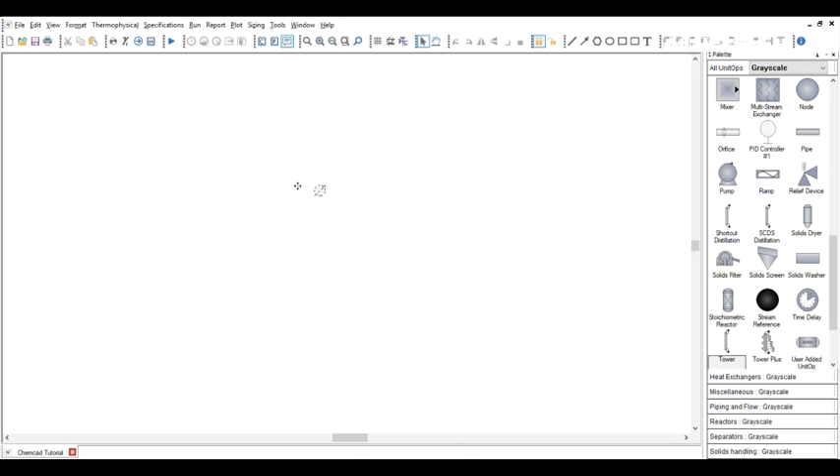We're going to add a distillation column, so scroll down in the palette until you find tower, this one right here. There's several to choose from. We'll just choose the regular tower for today and drag it onto the blank worksheet.

Scroll back up to the top of the palette and add the feed stream and product stream. Connect the feed stream anywhere on the column's left side to one of those blue dots, and then drag two product streams, one for the distillate and one for the bottoms.

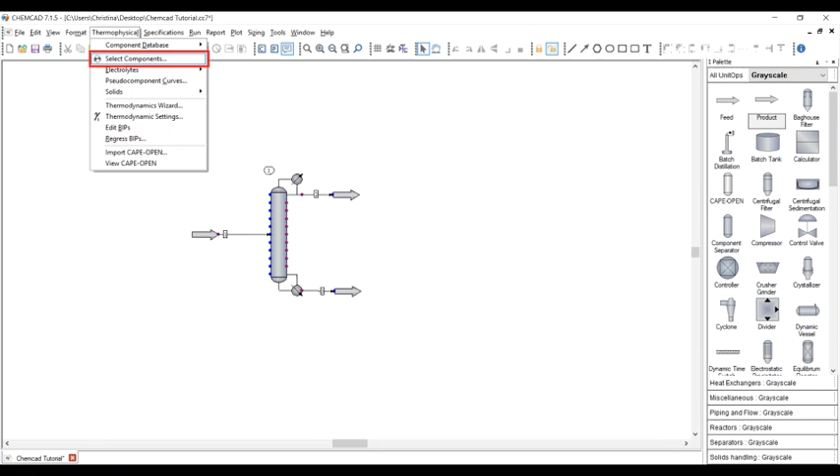Now that your distillation column has been set up, we need to select the chemicals that we're going to add to our distillation column. Come up here to Thermophysical, click on Select Components. Use the search bar highlighted in red to add the components butane, hexane, and pentane.

As soon as you select OK, the thermodynamics wizard will pop up. We won't worry about this now, just select OK. The next pop-up shows that SRK is the thermodynamic model they've chosen. We are going to change this in a minute, but select OK for now.

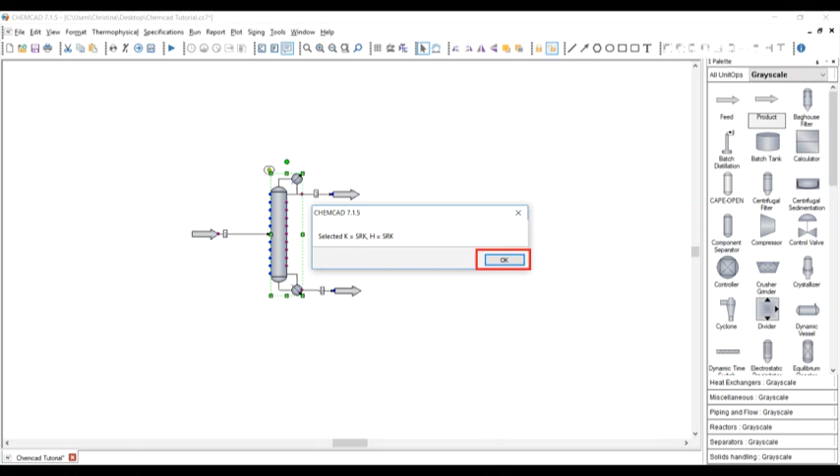The thermodynamic settings prompt will appear. Underneath Global K-Value Model, it should say SRK. Click this drop-down menu and change that to NRTL. Then select OK, and on the next prompt that appears, also choose OK.

Now we are going to open CHEMCAD. If you have trouble opening CHEMCAD, make sure that you're connected to the internet to authenticate your license. If you don't have a license, you're going to need to get one before you can go through with this. So open a blank workbook as I have here. If yours is not yet open, go ahead and click on this icon. We're going to start by saving this document. Save it to desktop as CHEMCAD tutorial.

Make sure that this palette appears on the right-hand side of your screen. If it does not display when you open up your screen, follow these steps: go up to View, and the palette marker here should appear. Check it, and the palette should now appear on your screen.

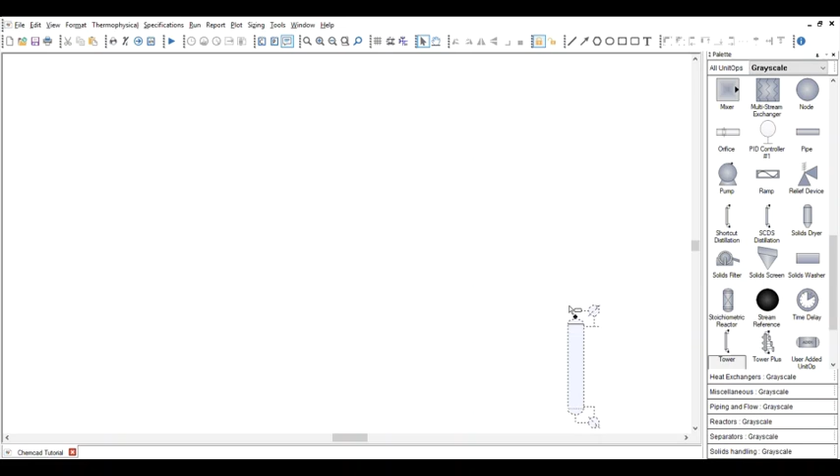We're going to add a distillation column, so scroll down in the palette until you find tower. This one right here. There are several to choose from, but we'll just choose the regular tower for today and drag it onto the blank worksheet.

Scroll back up to the top of the palette and add the feed stream and product stream. Connect the feed stream anywhere on the column's left side to one of those blue dots, and then drag two product streams, one for the distillate and one for the bottoms.

Now that your distillation column has been set up, we need to select the chemicals that we're going to add to our column. Come up here to Thermophysical and then select Components. There are many components to choose from. You can scroll through to find the ones you need, but I find it easier to search in this bar. Since butane is one of the components we need and is automatically appearing, you can just click on it here and add it.

Another component we need is hexane, which I'm typing now in the bottom search bar. I can click on it and click this arrow to add it, or I can double click and it adds it as well. For the last one, find pentane. You could scroll down this bar to find it, or type it in the search box. Be sure to select the correct pentane - we've got isopentane and pentane, and we want just pentane.

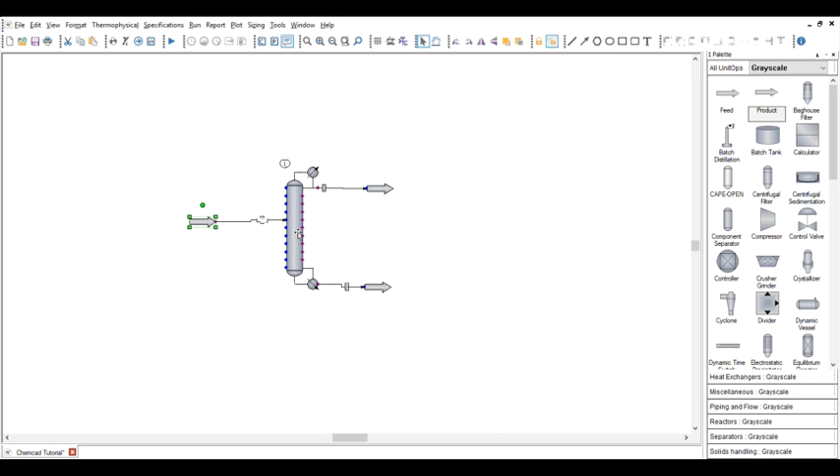Next, we need to specify the column. Double-click on the distillation column. First, under the General Editing tab, you want to fill in anywhere there's green highlighting important information. So for the number of stages, I'm going to choose 10, and for the feed stream, I'll choose 3.

Next, our tower needs further specifications, so click on the Specifications tab. For the condenser, we are going to specify a reflux ratio, R over D, of 2. And for the reboiler, we'll choose a bottom component fraction recovery of 0.98, for the heavy component, which I happen to know is hexane. If you didn't know that hexane was the heavy component, you could run this simulation with random specifications and figure it out based on which component appears more in the bottoms than in the feed.

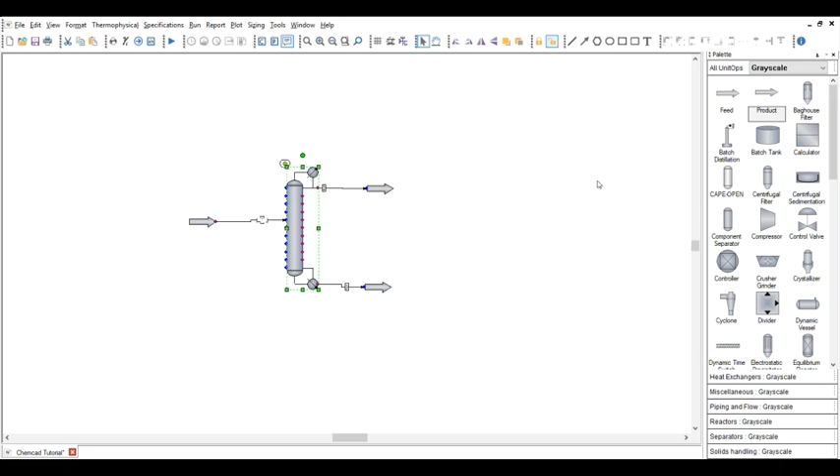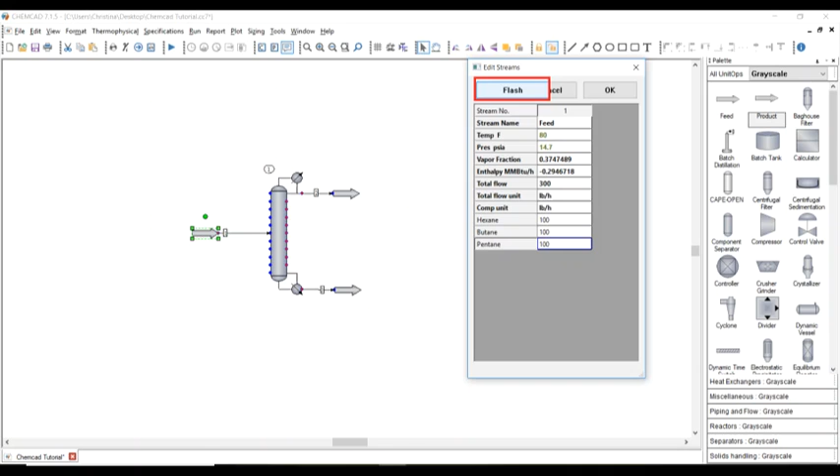Now we will specify the feed stream by double-clicking on the feed arrow and inputting the following data: stream name, feed; temperature, 80; pressure, 14.7; and down at the bottom, butane 100, hexane 100, pentane 100 pounds per hour. That'll give us a total flow of 300, which it should automatically solve for. Now, if you choose flash at the top left, it will solve for your vapor fraction and enthalpy automatically. Select OK, and now we are going to work on our unit op specifications.

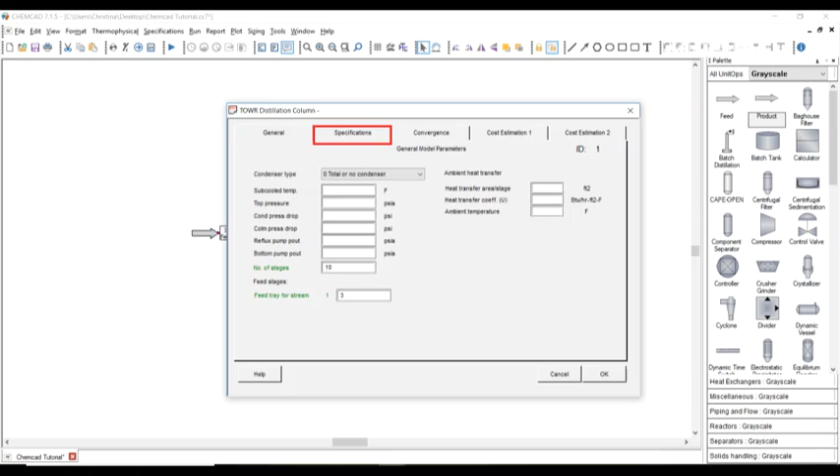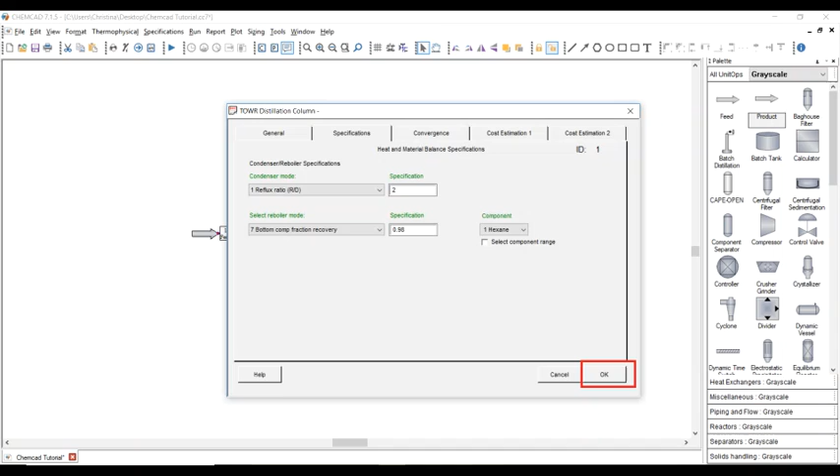So double-click on the distillation column. Under the General tab, type in 10 for the number of stages and 3 for the feed tray location for stream 1. Then go on to the Specifications tab, where we will change the condenser mode specification first. Choose reflux ratio, or R/D, on the drop-down menu and set it equal to 2. Next, for the reboiler mode specification, choose bottom component fraction recovery on the drop-down menu, and set that equal to 0.98 for hexane. Then go ahead and select OK.

Now we're ready to set up a data map. Go up to Tools.

Now this is your blank data map. The first thing you want to do is note the Excel workbook path. That is going to be the Excel that we saved earlier. So go ahead and click the Browse button, find it, and select it. Put it there.

Now, Excel worksheet name. Your workbook could have multiple sheets, so that's why we named one of ours CHEMCAD, so that it knows which worksheet to send the information to.

Now come down here to Map Rules. You have the option of sending information from CHEMCAD to your worksheet, or send information from your Excel to CHEMCAD. We're going to choose to worksheet and choose either a stream or a unit op here. We're going to choose a unit op.

Now, we only have one unit op, but we need to specify its object ID, which is 1. So make sure you include that. Then par ID, this is going to be which parameter. So we're going to send the condenser duty, and send it to worksheet cell A1.

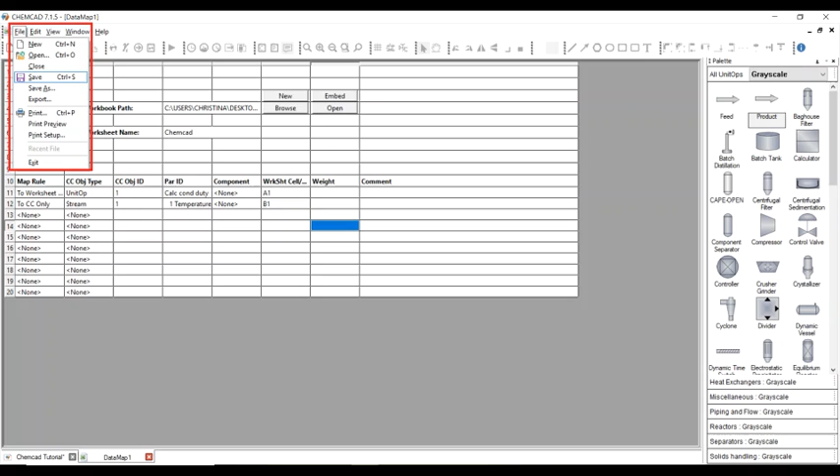Now that your data map is complete, go over to this bottom left-hand corner and select the CHEMCAD tutorial page, because now we have to define execution rules for our data map. So come back up to Tools, highlight Excel Data Map, and then select Execution Rules.

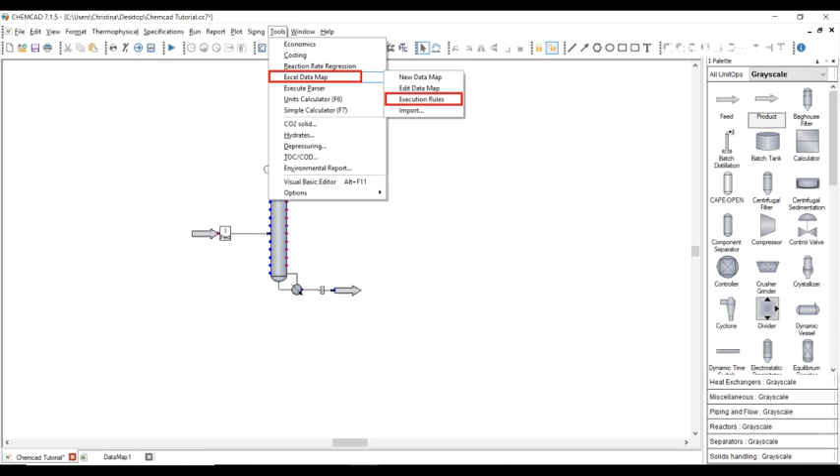You'll now need to click that red box to select your data map. Select Data Map 1, which is the only one that should be available to you, and then click OK. If you had multiple data maps, you would have to select which one you wanted these rules to apply to.

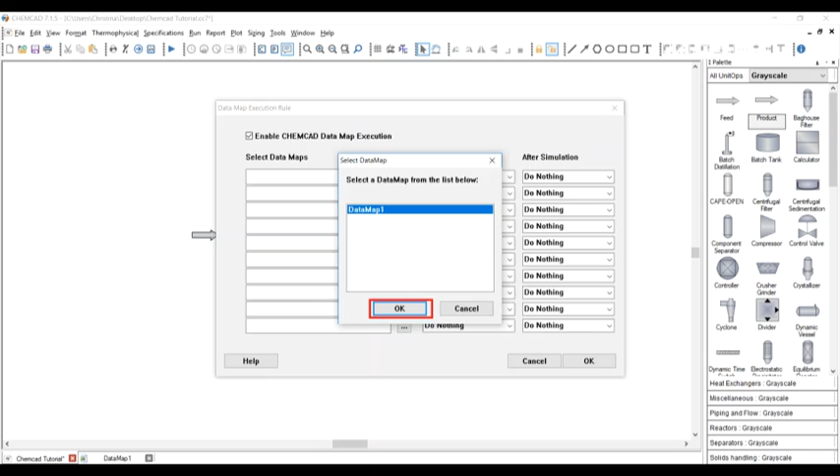So now you're going to change the before simulation and after simulation rules that correspond to that data map. Before the simulation, go to CHEMCAD, and after the simulation, go to the workbook.

Then select OK. Pull up your Excel file real quick, and in the space for B1, go ahead and type in 80. That corresponds to the temperature of feed stream 1 that we are sending to CHEMCAD before the simulation.

Now come back over to CHEMCAD, and we can finally run our simulation and see what happens. Popping back over to Excel, we can see that in A1 we have a condenser duty that was calculated as negative 0.093. You'll notice that B1 did not change because it is only sending information to CHEMCAD before the simulation is run, whereas A1 is taking data from CHEMCAD after the simulation is run.

You can run this simulation again and change B1 to, I don't know, 100 degrees for the feed stream and see if your condenser duty changes as a result of that and would be reflected in A1.